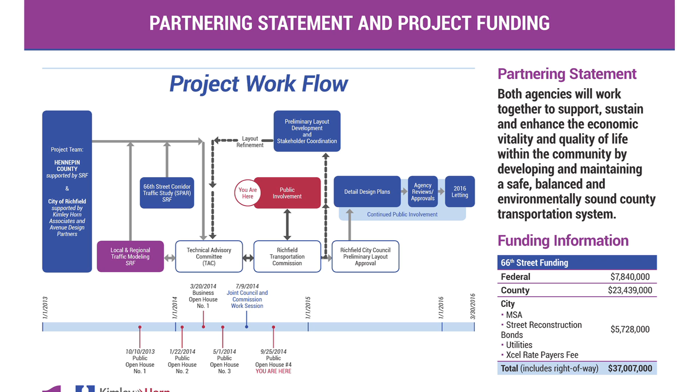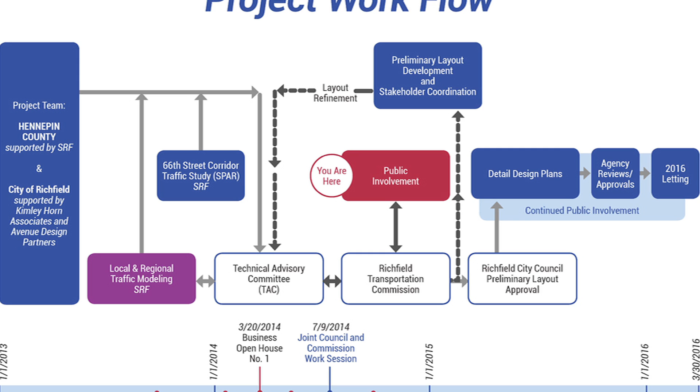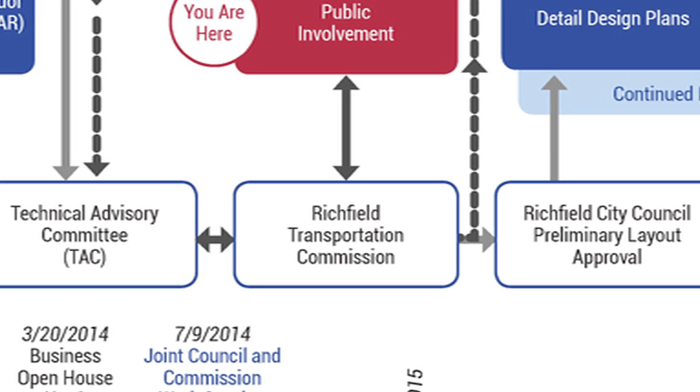The first slide explains the project workflow. As you can see, the project has been in process for quite a while. We are currently in the public involvement stage, preparing preliminary layouts and presenting at public open houses for comments and review. After the concepts have all been recommended by the Transportation Commission, we will go to the City Council for preliminary layout approval and then into final design.

The project itself is funded in several ways. There's federal money that has been awarded to the project in the amount of $7.8 million. Hennepin County will be contributing $23.4 million, and the city will be contributing $5.7 million through various means such as state aid, gas tax, street reconstruction bonds, utility rates, and Xcel rate payers fee.

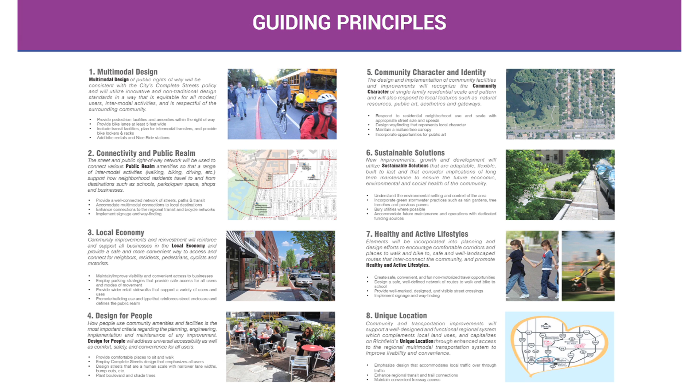The guiding principles were developed in coordination with the advisory commissions and the city council, as well as business groups in town and resident input. The guiding principles are meant to help guide preliminary design of the projects in Richfield.

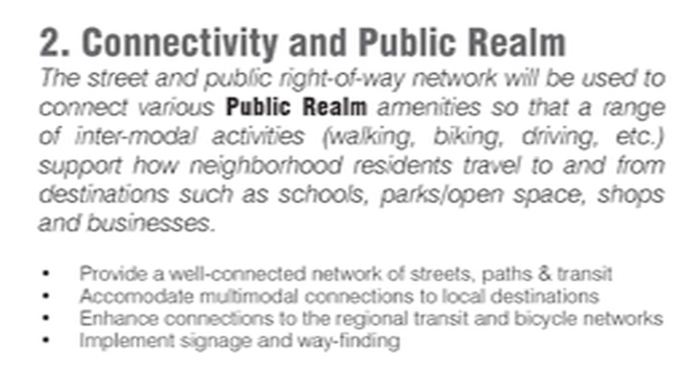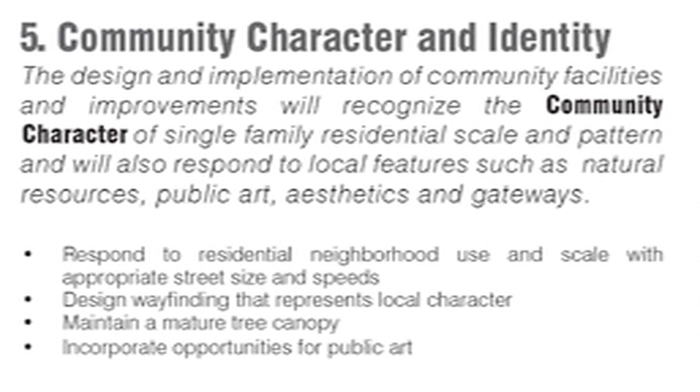They include multimodal design, connectivity and public realm, local economy, design for people, community character and identity, sustainable solutions, healthy and active lifestyles, and unique location.

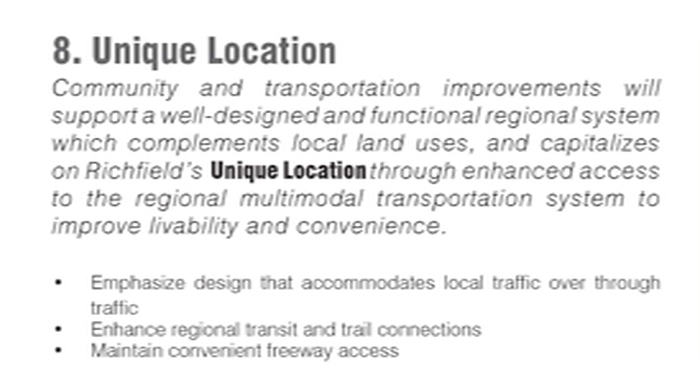The project process involves evaluating concepts with the project goals through coordination with stakeholders. Specifically, the project goals include improving pedestrian experience both along and across the roadways, improving transit passenger waiting experience and building on pedestrian safety, providing space that's comfortable for recreational and commuter bicyclists, providing center turn lanes to minimize conflicts, narrowing lanes to reduce speeds, and adding green boulevards for snow storage and maintenance.

Staff is in coordination with the City Council, the Transportation Commission, the county, property owners, Federal Highway Administration, Metro Transit, MnDOT, and business owners along the corridor.

There have been several open houses to date on the 66th Street project. Common themes from previous public meetings include the desire to minimize property impacts, minimize acquisition of properties west of I-35W where right-of-way is tight. Complaints include sidewalks that are too close to the roadway, sidewalks that are not well maintained, not enough space for snow storage, and high traffic volumes and speeds that make crossing the road difficult as a pedestrian and bicyclist.

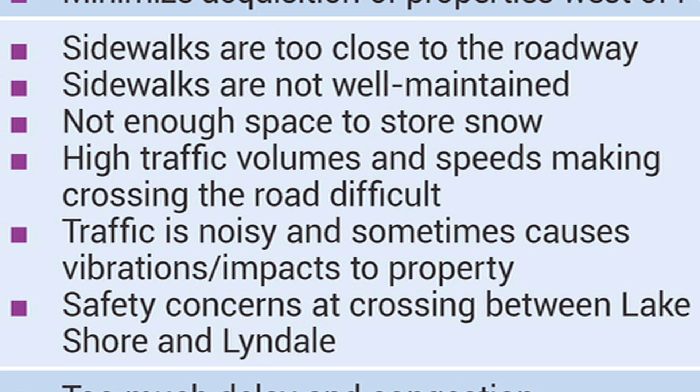We heard safety concerns specifically about crossing between Lake Shore Drive and Lyndale Avenue. Drivers complained of too much delay and congestion, and high traffic volumes that make it difficult to cross the corridor and turn from and onto the corridor. Bicyclists complained about traffic volumes and speeds that discourage bicycling in the corridor, and the fact that there was no dedicated space for bicycling.

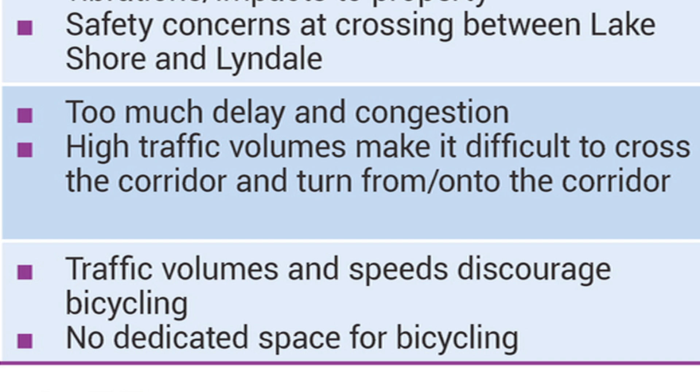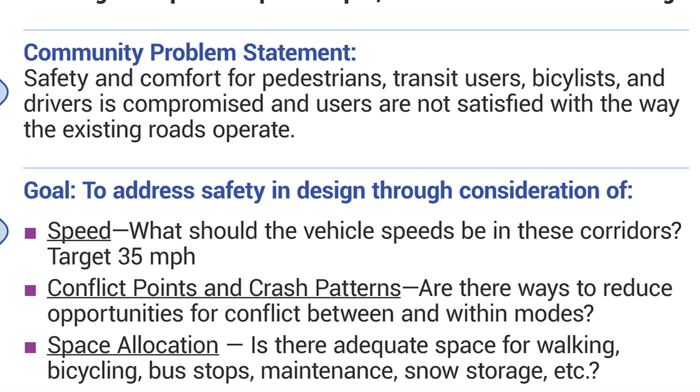Using the guiding principles and the public input, we've identified the following community problem statement: safety and comfort for pedestrians, transit users, bicyclists, and drivers is compromised, and users are not satisfied with the way the existing roads operate. Our goal is to address safety in design through consideration of speed, conflict points and crash patterns, and space allocations.

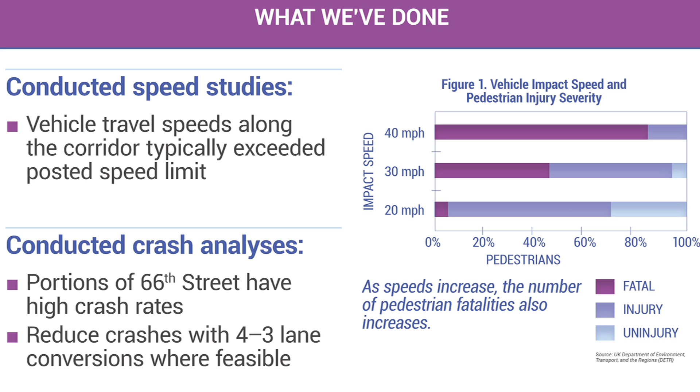In preparation for preliminary design, we've conducted speed studies to determine what speeds vehicles are traveling through the corridor, and conducted crash analysis to examine what crashes have existed in the past and how we could potentially reduce those in the future. The slide regarding conflict points is to better explain why different intersection designs can improve safety.

None of the major intersection designs have been decided yet. We are examining both traditional signals and roundabouts at the major intersections to see if there are benefits to each.

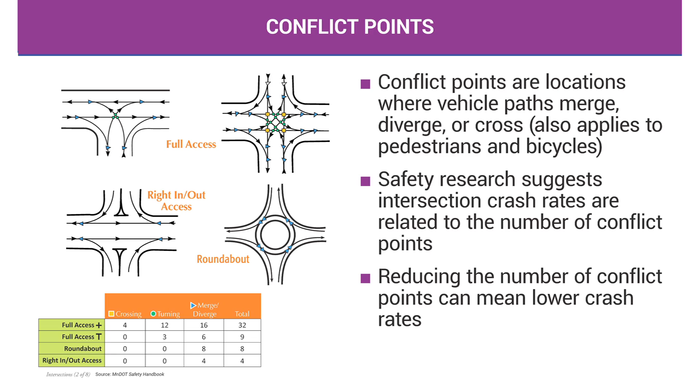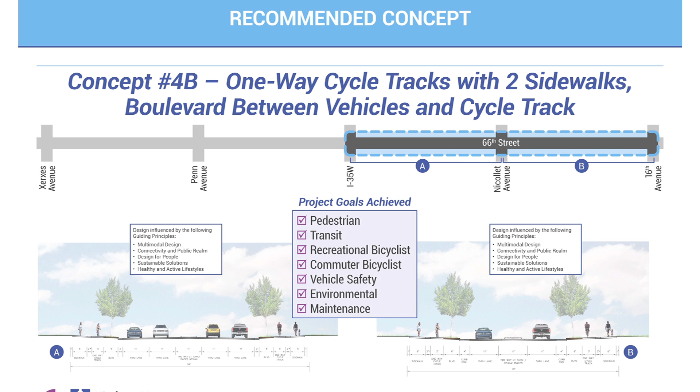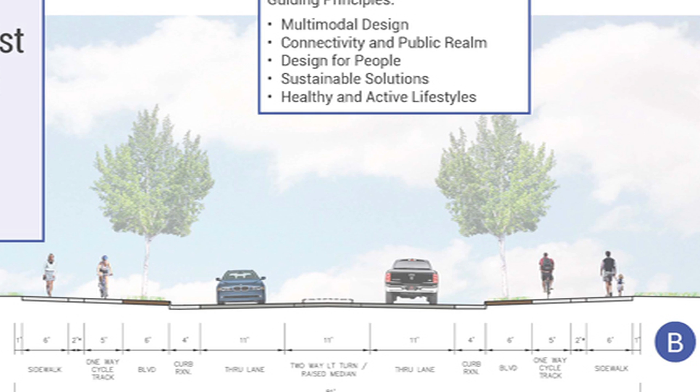East of I-35W, concept number 4B has been recommended by the Transportation Commission for City Council approval. It will go to the City Council in October for that decision. The concept, which includes one-way cycle tracks with 2 sidewalks and a boulevard between the vehicles and cycle track, was recommended over concept number 2, which included on-street bike lanes. Concept 4B, as you can see by the cross-sections at the bottom of the slide, will fit in both a 3-lane and 4-lane divided configuration.

The main difference between concept 4B and concept 2, which was not advanced, is that the sidewalks are on the far outside, the bike lanes have been pushed back behind the boulevard, and there are no on-street bike facilities. This has the advantage of protecting the bicyclists as they are biking along the corridor, while maintaining separation between the pedestrian, the bicyclists, and the motor vehicles.

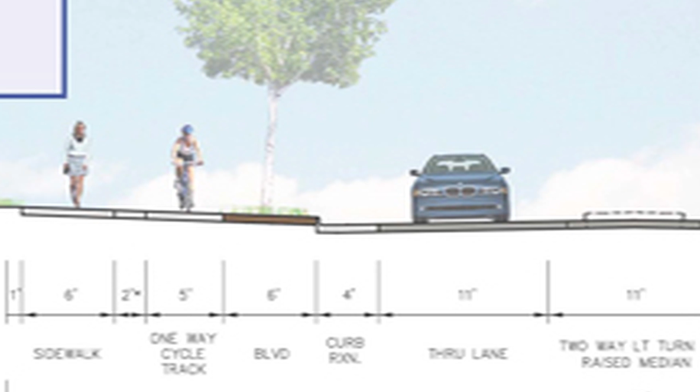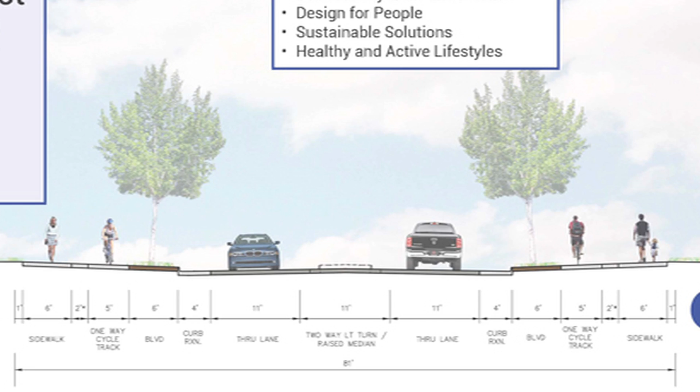East of Nicollet Avenue, the roadway will consist of a 3-lane section, that's 1 travel lane in each direction with a center turn lane. West of Nicollet Avenue, the roadway will be much like it is today, in a 4-lane divided configuration, with occasional left turns where needed, and medians. Medians may also be placed east of Nicollet Avenue in the 3-lane configuration, where it's determined they make sense for pedestrian crossing safety.

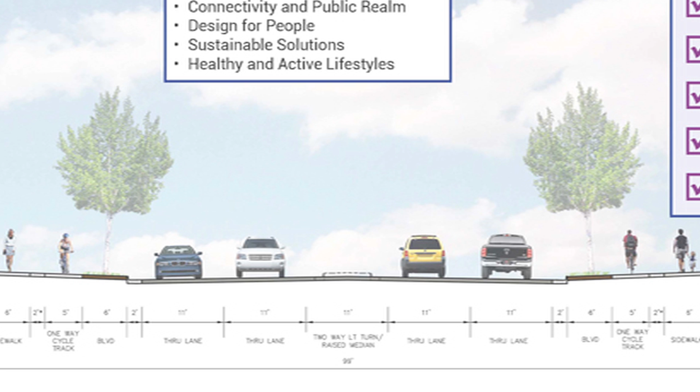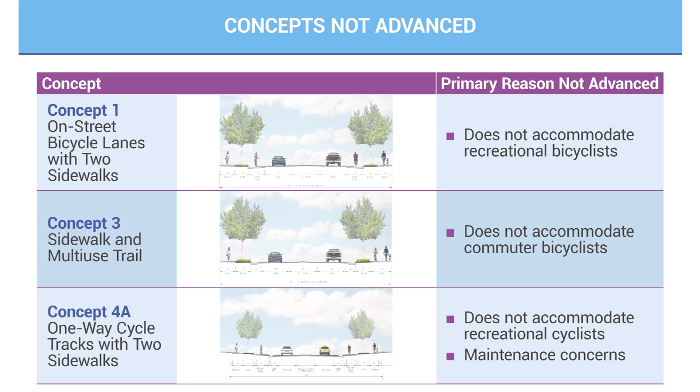Previous concepts that were examined but not advanced include concept number 1, which was on-street bike lanes with 2 sidewalks, but no recreational bicyclist facility; concept number 3, a sidewalk and multi-use trail with no on-street or commuter bicyclist accommodation; and concept number 4A, which was one-way cycle tracks with 2 sidewalks that put the cycle tracks immediately behind the curb. This was determined to be more difficult for winter maintenance, as snow from the roadway would continue to be pushed onto the bicycle facility.

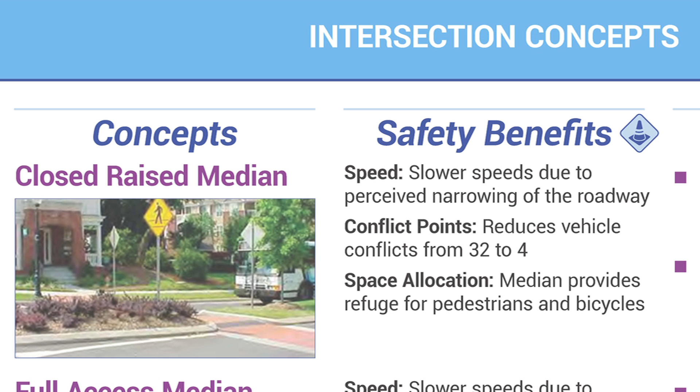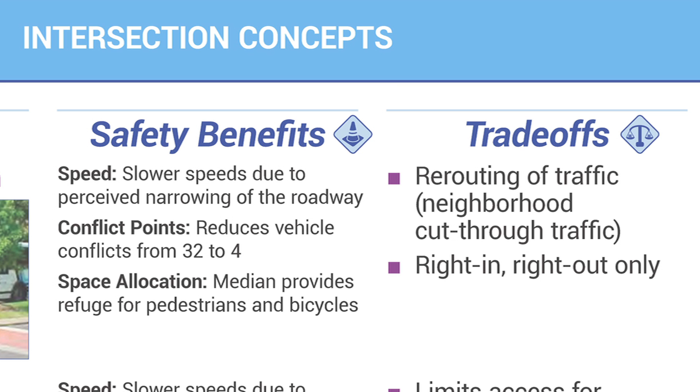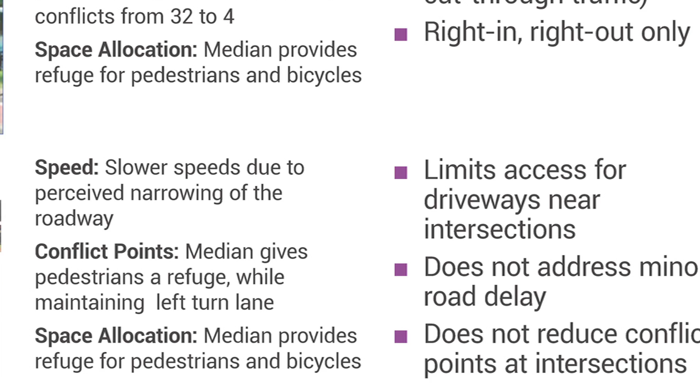There are several concepts being looked at to increase safety at intersections. One would be a closed raised median. This would involve closing off the side streets at specific locations to improve crossing safety and reduce conflicts between turning vehicles. Another is a full access median. This is the type of intersection that will be used on the reconstruction of Portland Avenue. Full access will still be maintained in all directions, but a raised median will be placed in the center of the roadway to facilitate safer crossings and reduce speeds along the corridor.